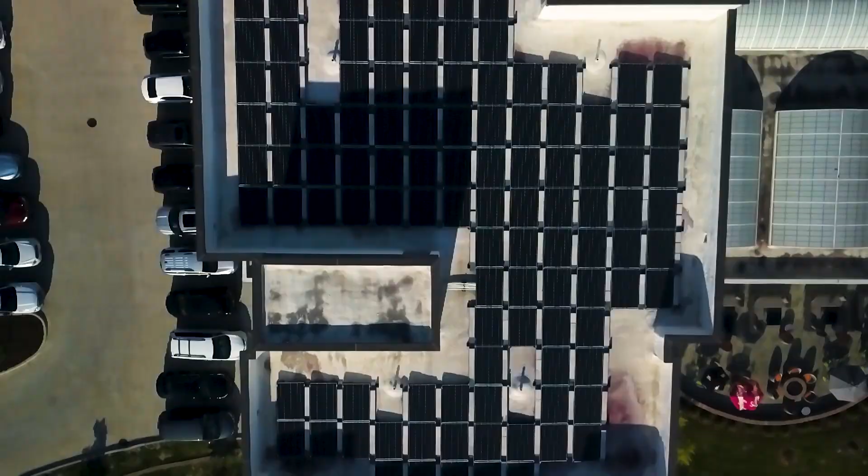All right, so we're going to unpack what happened on Battery Day. We're going to do it in 3 chapters. Chapter 1 is a quick recap of the important things revealed, and remember, there were a lot of them. Chapter 2 is what does this mean for Tesla, for the auto industry, and for you. And in Chapter 3, we're going to revisit the Osborne effect and why Battery Day is bigger than Elon let on.

Drew Baglino, who is the Senior Vice President of Powertrain and Batteries at Tesla, has been with Tesla since 2006. He was on stage with Elon following the shareholder meeting, which was held kind of like a drive-in movie. Yeah, if you didn't know what you were looking at, it would kind of look like the worst traffic jam in history, complete with beeping and everything.

This is where the shareholder guests who got in by lottery were socially distanced in their Teslas. Very creative way for Tesla to do this. It's funny that we haven't seen other auto manufacturers do this for their investor days. Normally, they're not this exciting, because they'd have to have their ICE cars just sitting there idling.

Yeah, so anyway... please. Oh, I'm going to pass out.

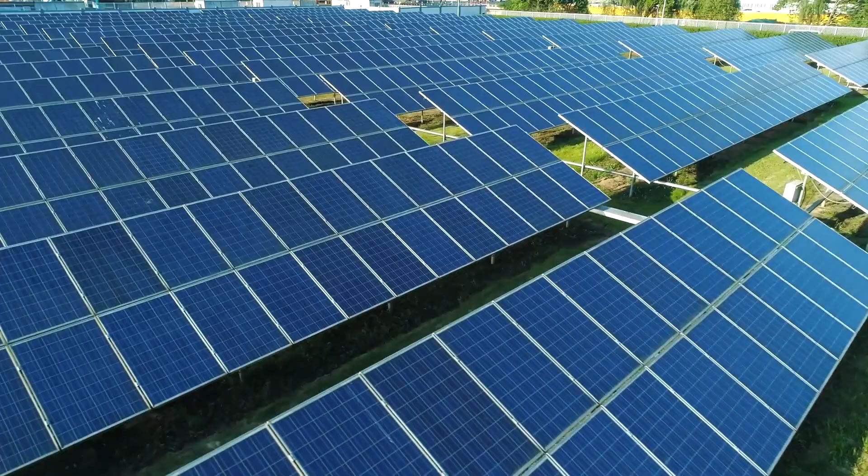Elon and Drew started the presentation about why Tesla is doing this at all. Why are they innovating? They pointed to the CO2 levels in our atmosphere, which are skyrocketing, and said we have to transition to sustainable energy in order to support life on this planet as we know it.

I just want to point out, this is different than any other company you ever hear about, because instead of saying we're doing this to make more money, they're talking directly to their shareholders sitting right in front of them. And instead of saying we're doing it for you guys, you shareholders, you give us money, we give you money, money, money, money makes the world go round, they're going, yeah, the world might keep on spinning, but we might not be on it any longer, or at least we won't have such a wonderful civilization as we do now. So it's really cool that during Investor Day, they're not like, we're seeing how we can squeeze every little penny to give back to our shareholders.

They pointed out that the trend is reversing, but that we need to accelerate that trend.

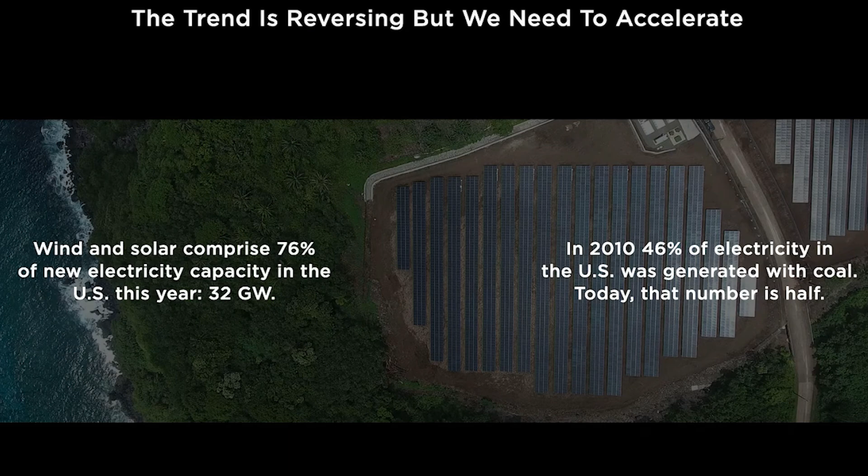They pointed out that in the US, 32 gigawatts of wind and solar capacity have been added this year. That's 76% of new power capacity. And to give you some idea about how the grid is getting greener, in 2010, 46% of US electricity generation was made by coal. Today, it's only 23%.

But Elon talked about how we need to accelerate this, how we can't just say we did a good job and sit on our laurels without doing anything more. And Elon showed how Tesla has been contributing.

As Elon said, Tera is the new Giga. I thought it'd be important to point out what that actually means. A terawatt equals 1,000 times a gigawatt, and that's 3 orders of magnitude in Elon speak.

So the problem, number one here, is that today's factories cannot scale fast enough to get to his goal. We would need, for instance, 135 gigafactories just to get to this goal. We'll be discussing how Tesla plans to solve this problem a little bit later on.

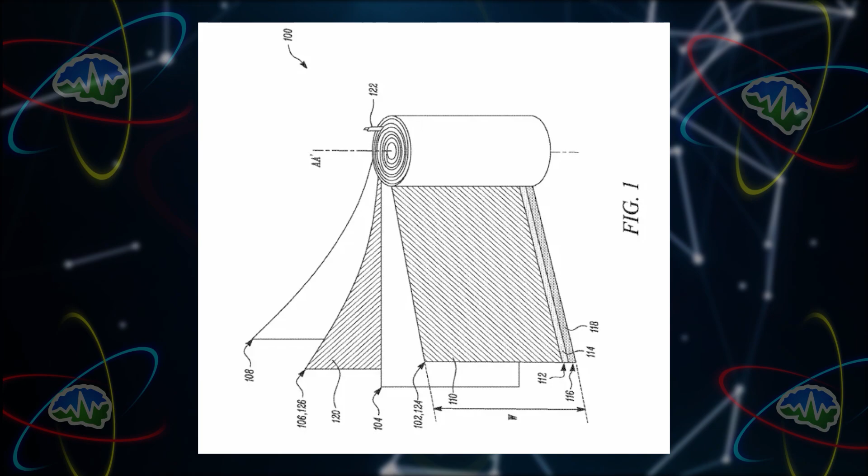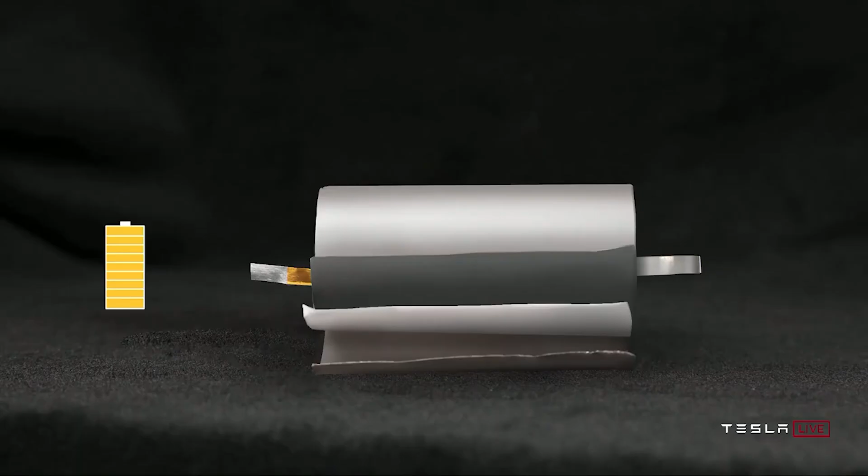So they first showed us a video of their original 2170 battery unrolling. You see one tab on the top, one tab on the bottom - this is how you charge and discharge the cell. You attach to those two tabs, and that's what allows you to charge it. But if you are an electron on the very far end of one of the sides of the jelly roll, you have to travel all the way down the jelly roll and then through the tab. And you heat up the pack the whole way.

Exactly. So if you were to make this large cell the same way, with this one tab sticking out of both ends, you would have a lot of thermal problems. You wouldn't be able to charge it or discharge it that quickly. It would work, but you couldn't do what you wanted to do with it, because it would overheat and damage itself.

So this is where the tabless design comes in. Basically, any electron can leave the cell just through the top or the bottom at any time. And so that's where we get this beautiful image of the top of the cell. So you can kind of say that it's not tabless per se, but that it is more tabbed. It's so tabbed that you wouldn't even call it a tab.

But this looks really familiar for some reason. Yeah, this is actually what was on the t-shirts that the people were wearing, and it was also what was on the invitation. Everyone thought that it was the silicon nanowire anode. Not that. It was actually a zoomed in picture of this. So it was a giveaway, but we just didn't know what it was.

Interesting. And I just want to say a big kudos to you because you got the size almost perfectly right. We had reported that we thought it was a 4576 by your calculations. Turns out it was a 4680. So I was off by 1 millimeter in diameter and 4 millimeters in height. Wow, it's pretty close. Yeah, really close.

And so this is what the cell looks like. And so what does this mean? There would be a 5 times increase in the amount of energy in this battery cell. Now, you might be saying, oh my gosh, Tesla cars are now going to have 5 times as much energy in them. No, it's per cell, and the cell is bigger. But there will be a 16% increase in range, just from this one thing.

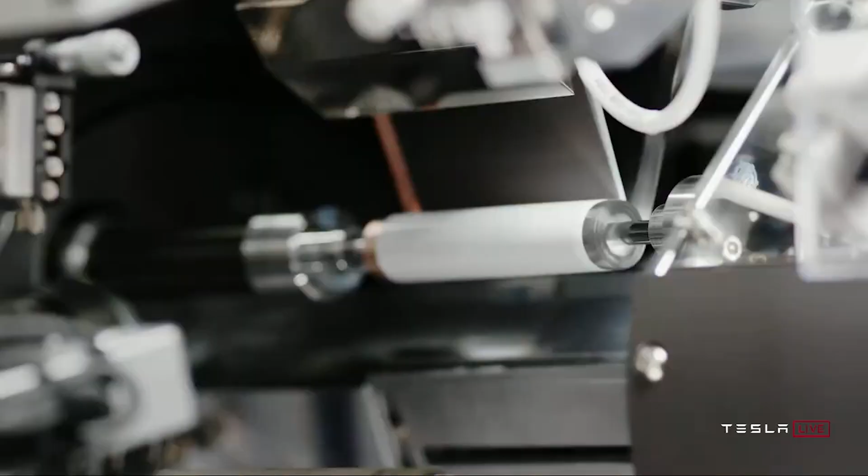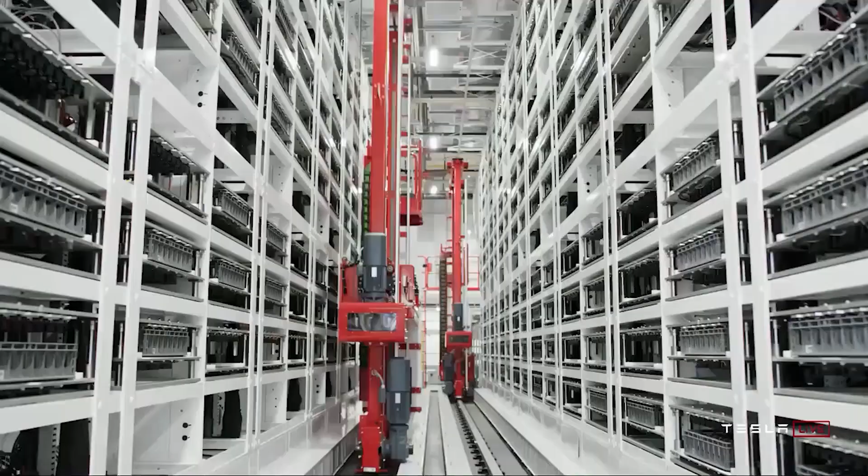I'm not sure exactly what the amp hour capacity is of this battery. We're going to learn that probably as soon as they start coming out. And the cool thing is they're producing these right now at the Kato Road facility down the street, and they're making them in volume. Drew said that they have actually made tens of thousands of these already at a rate of 10 gigawatt hours per year. Compare this to Giga Nevada, which makes 35 gigawatt hours per year. And think of the size of Gigafactory Nevada compared to the Kato Road facility, which is kind of tiny.

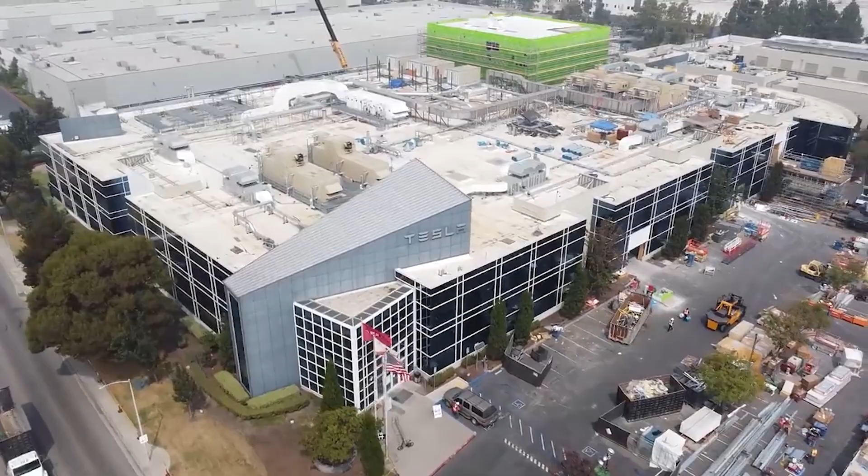So this basically means that they have a working pilot production line that they can replicate, because you can just go out and buy the parts or remake it and multiply it as many times as they want to. That is something that they could have stopped the presentation right here and said, and there you go. Yeah, and they could have left. And we should have all been pretty impressed by that, because that is impressive. To not only have made this cell with those specs, but also to have the pilot line ready to go that you can then duplicate in your factories.

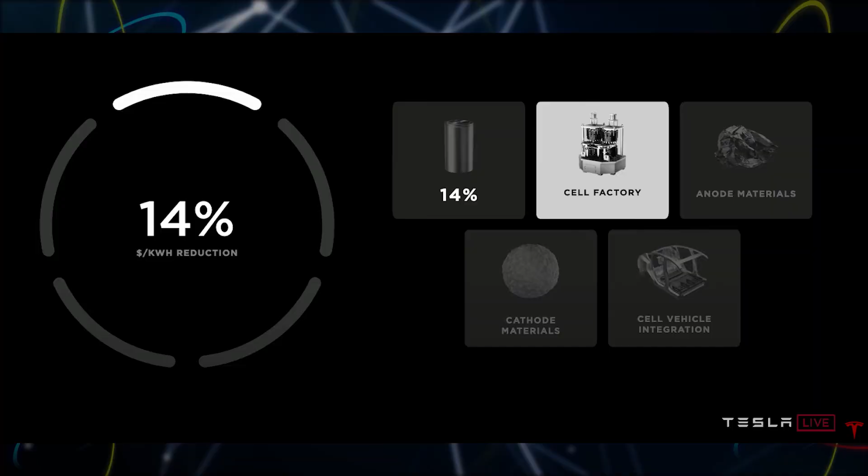Right, because this is a 14% reduction to the price per kilowatt hour. So if they had just come out and mic dropped after this, it would have been like, whoa, you already got a 14% cost reduction? Right, but that's not all.

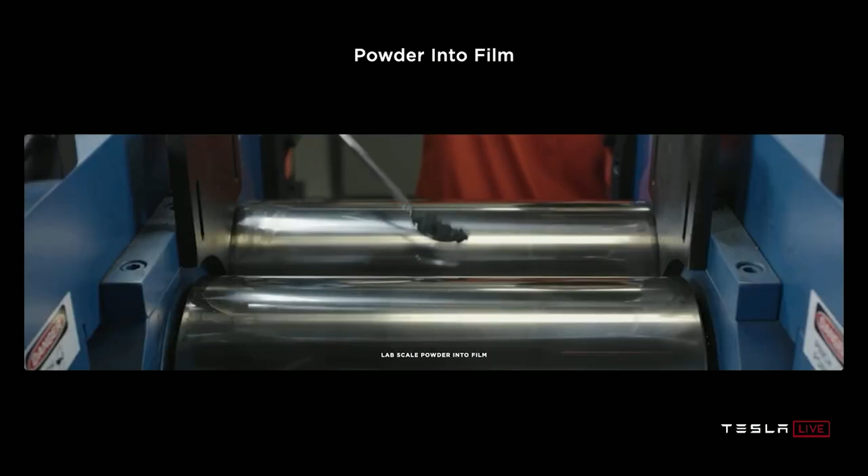By eliminating this, they have a 10 times footprint reduction, which means that they don't have to worry about wetting, mixing, or drying any of this wet electrode. Which kind of points to why the Kato Road facility is so much smaller than we'd expect. Exactly. And it has a 10 times energy reduction, because you don't need to be drying stuff, which obviously takes a lot of energy. And so what they showed here that they're going to is a high-speed continuous motion assembly. Nothing ever stops. I want you to think about this for a second. When I think of a factory, I think of this.

It's slow, but their factory is showing that nothing ever stops. As Elon said, conveyance does not count as useful work.

What does he mean by that? Just because you're moving something over to a machine that's going to do work on it, that doesn't really count. You want everything to be both conveying and doing work at the same time. You don't want it to just be like, okay, here you go, Bob, fill it up, Bob, okay thanks Bob, moving it on to the next station. No, you want it to be moving and pouring at the same time, then going off to the next thing. Elon doesn't want any waste of space.

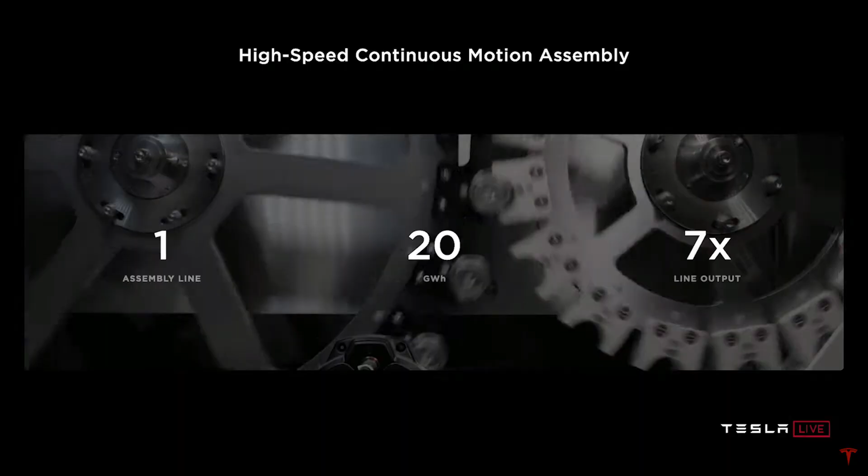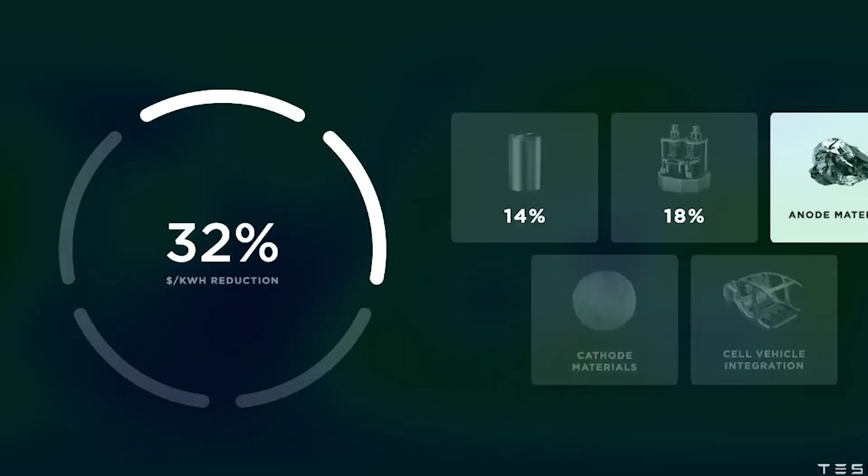So this new cell factory line will be able to produce 20 gigawatt hours a year, and it's 7 times the line output, at 86% formation investment reduction and 75% formation footprint reduction. So we've now dropped to 32% of the dollar per kilowatt hour. What a savings we already have. This is a huge deal. And again, they could have mic dropped there. They could have said, 'and that's battery day,' 32% reduction in battery cost per kilowatt hour, which is the thing that you care about. That's amazing. But we're not done yet.

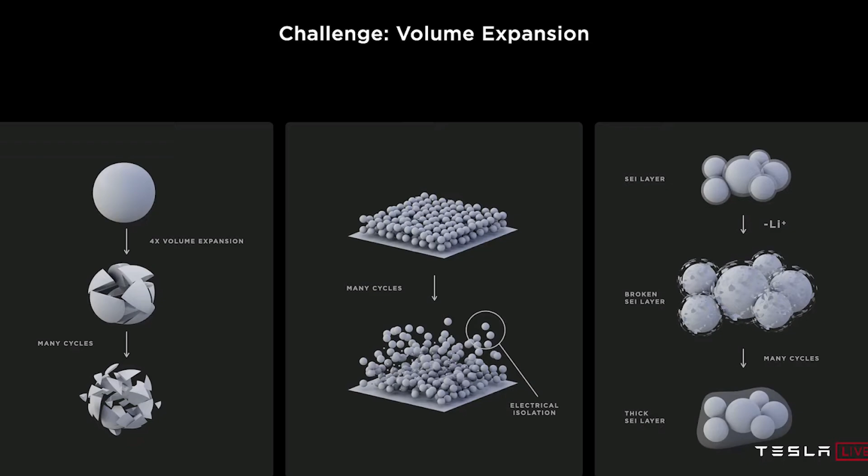So let's talk about the anode material. As Drew said, silicon is awesome and inexpensive, but the challenge has been that when you put silicon into a battery, it expands by 4 times every time you charge up the battery, and so it cracks. This leads to a problem, because then your battery cell degrades very quickly, which is not something you want in a battery you want to use again and again. But what's awesome about silicon is that it's super cheap, dirt cheap, because it's basically sand.

And so they've come up with an elastic ion conducting polymer coating. I don't know what that is, or how they did it, but this basically increases the range by 20% with just this one improvement. First they stabilize really tiny particles of silicon, then put it into an elastic binder that can both transmit electricity through it, but also expand and contract with the material itself. Again, this could have been all they had to say at Battery Day and mic dropped again, and it would have been amazing. 20% increase in range, that is huge. And on top of that, we're now up to a 37% reduction in dollars per kilowatt hour.

And let's not forget the cathode. Right now Tesla has nickel-based cathodes, which are expensive but very energy dense, and iron-based cathodes, which are less energy dense but cheaper. They talked about how they were working through new ways to create battery cathodes with nickel without having to use cobalt. That's huge in itself, because if these batteries could be cobalt free, it means we can finally get away from this sort of blood diamond discussion, where there's a lot of human rights concerns about producing batteries that contain cobalt. So by getting rid of cobalt entirely, we don't have to worry about that anymore.

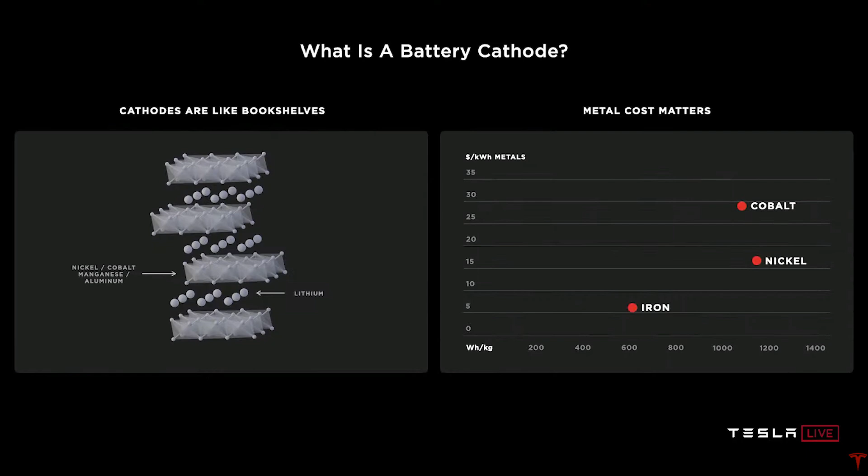Then you have nickel, which isn't as expensive as cobalt, which is great, and gets you great energy density. So that's an obvious choice for most batteries, but we have a limited supply of nickel. So even though it's not that expensive and is great for battery manufacturing, we don't have enough nickel being produced in the world. Not that there isn't enough nickel in the world, but there isn't enough being produced at the moment to keep up with demand.

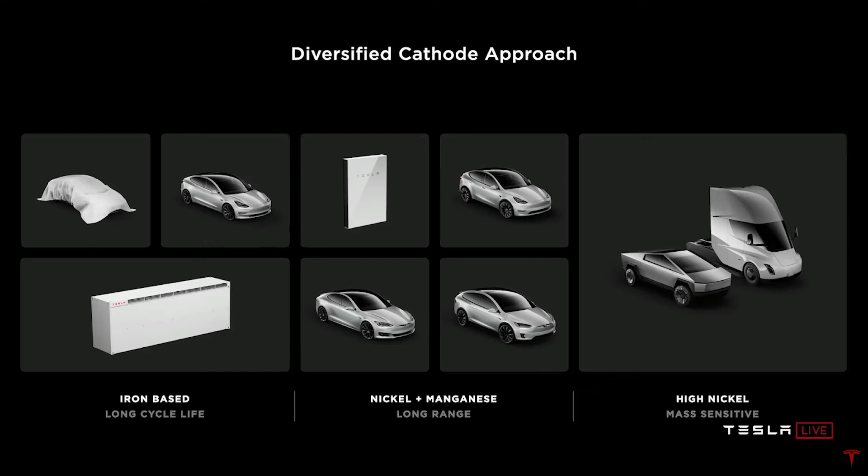So Tesla is diversifying their cathodes. They're looking to iron, which is even cheaper but less effective as a battery, to be used in products that don't necessarily need the highest ranges. Lithium iron phosphate is a great choice for grid storage, where you don't need to worry about how light it is. And it's a surprise to see in this graphic that they seem to want to put it into the Model 3. We know they're already doing this in China, they have iron batteries in those. But it's funny that they also have the Model Y on the other side with nickel batteries, and then high nickel density batteries for the semi-truck and the Cybertruck.

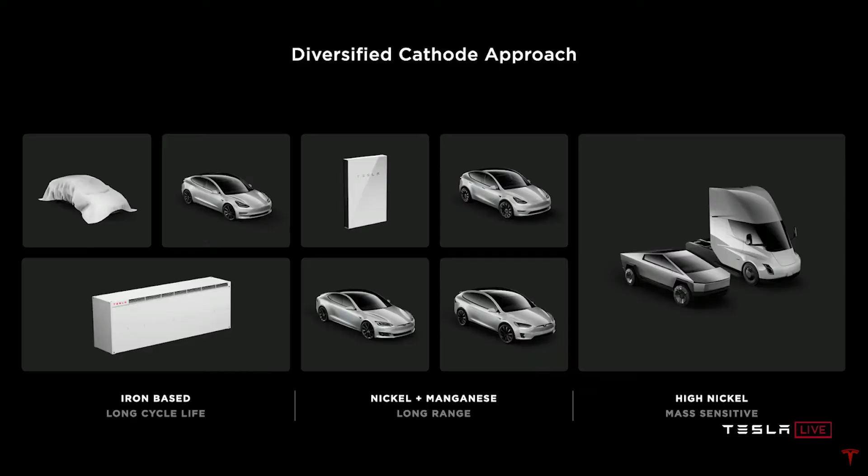I kind of wasn't expecting to see the Cybertruck with the semi-truck. I thought it would be back with the Model S and X. So that's interesting. And again, we get this glimpse of this covered car in the iron battery category, which would be whatever you want to call it, the Model 2 or the Model A, and the robotaxi. Yeah, we'll get to that.

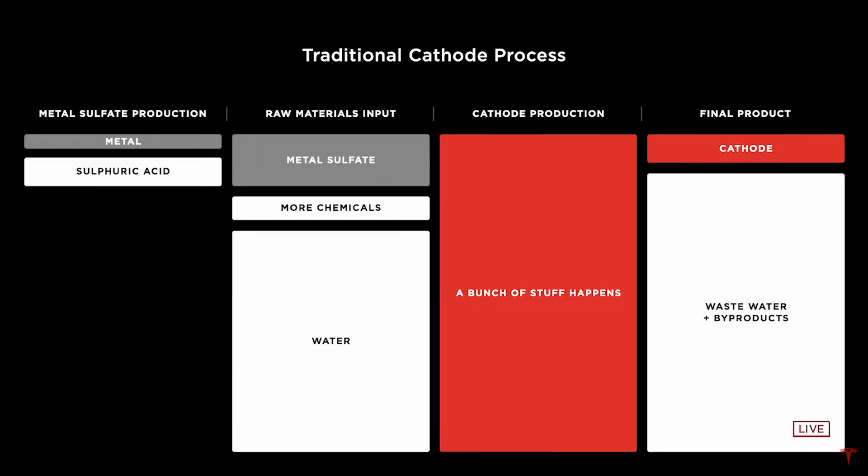So then they discussed how they can save by processing the cathode in a novel way. Basically, they're able to take raw metal nickel powder and mine it and process it cheaper than they were before, and they get a 12% savings. So now we're up to 49% cheaper dollar per kilowatt hour to make a battery. And again, drop the mic, 50% cheaper batteries? Are you freaking kidding me?

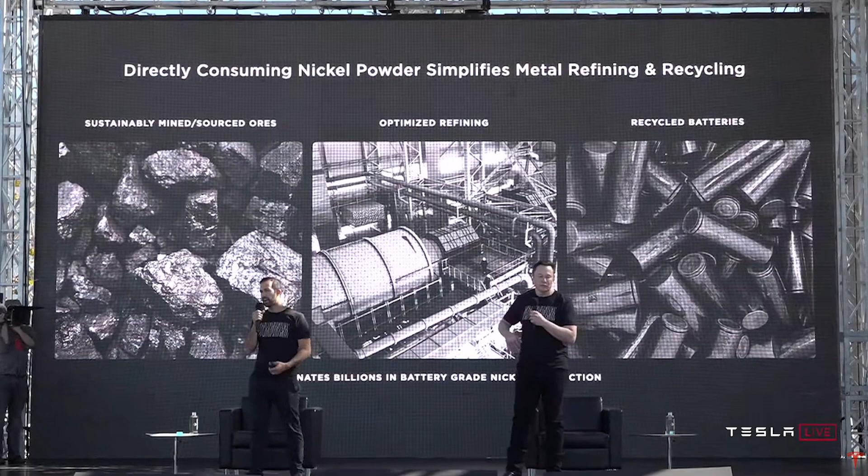What's really cool here is that they mentioned that with a simpler mining of lithium and nickel, it also makes for simpler recycling. They didn't mention Redwood Materials, which I kind of thought they would in this presentation, but I think it's through a partnership with them that they're able to bring this in-house, because they mentioned that going forward there's going to be more and more batteries that need to be recycled as we get more and more cars. So they're going to in-house start recycling them, because look at this graphic here: it's cheaper to take the materials out of a battery you just made than to go mine them. Why pick through dirt and rocks and twigs if you're mining it? Why not just take old batteries, rip them apart—all the stuff we need for batteries right here because we're making a battery.

And they explain that they're using a new process involving table salt, sodium chloride, that they can extract lithium cheaply from clays. Yeah, and there's 10,000 acres right in Nevada that has enough lithium in the clays there to supply all of the U.S. battery needs. So again, they just developed a new way to get lithium that they said no one else had ever come up with. This kind of puts an end to that argument that your old Uncle Joe is going to say, like, they're getting all the stuff from China or Saudi Arabia or wherever I don't like. No longer the case, unless your uncle doesn't like Nevada.

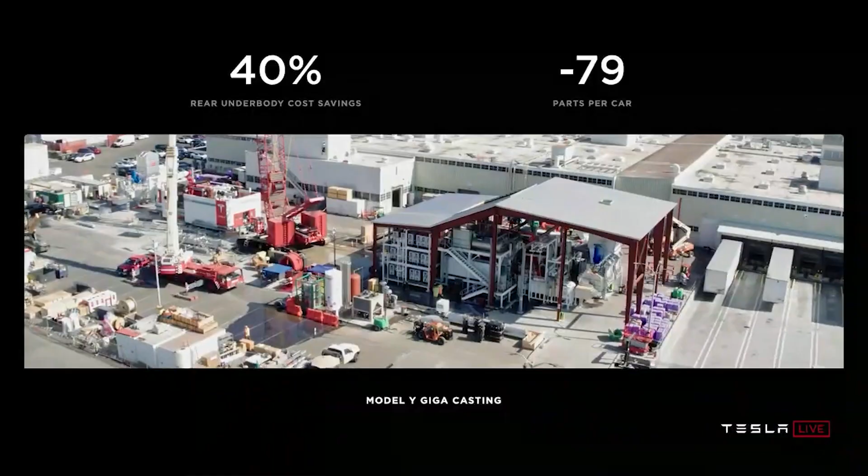All right, so let's go to the next step, battery integration. We've showed you the GigaPress before, but now we get to actually show it to you in action. Check this out. Now, I just want to say, this is not how any car manufacturer produces any large part of a car at all. This is a completely new process. Sure, there are castings, but none of this size and magnitude.

And what this means is that you can reduce the cost of the Model Y's rear underbody casting by 40%. Yeah, with 79 fewer parts per car. And they're going to be able to do this with the front body casting as well. They also talked about having a structural battery pack, which further lowers mass by 10% and increases range by 14%. This means that you don't have to make modules and packs—you actually just put the batteries into a structural thing that it's all one unit, and that becomes the structure.

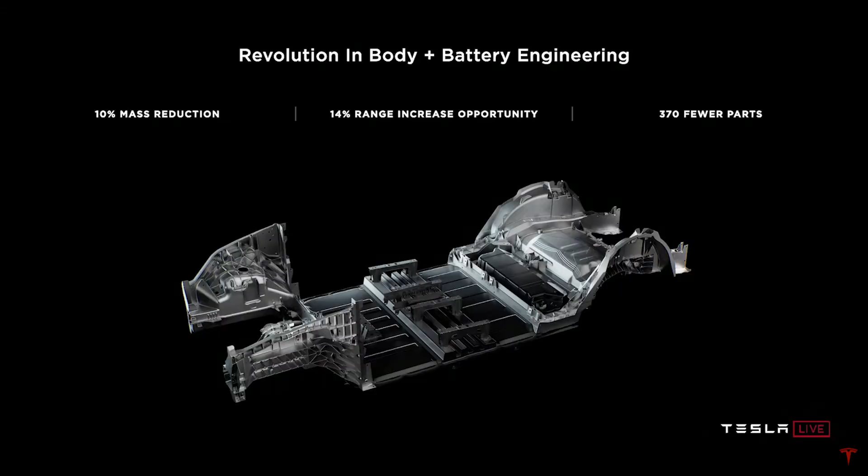Which is a lot like an airplane wing. Exactly. Elon was saying even in a Formula One car where you'd have two pieces of carbon fiber with like an aluminum honeycomb, which gives it really, really good strength, you're doing the same thing here, but with the batteries of the car. So it's no longer just air, it's actual batteries that are now a part of the frame of the car. It's a really, really smart process, and it's going to eliminate 370 parts from your car.

Now you might be saying, 370 parts, blah blah blah, whatever. No. Take any one part. Think of a bolt—it's just a bolt. I don't care. When you're manufacturing something, it's not just a bolt. It means that there needs to be a machine that makes bolts somewhere, and you need a guy to go run it every day. Then that guy needs to put all the bolts in a big bucket and send them to you. And then you need to have a space in your factory for those bolts to go. Then you need someone to go over, get the bolts, put it into the machine, you dump it in, however you do it.

You need to worry about all of that for every single part. So by eliminating 370 parts from that, imagine the savings, and you just go right into the cast. It's all set. That's insane. Yeah, that could have been another mic drop moment.

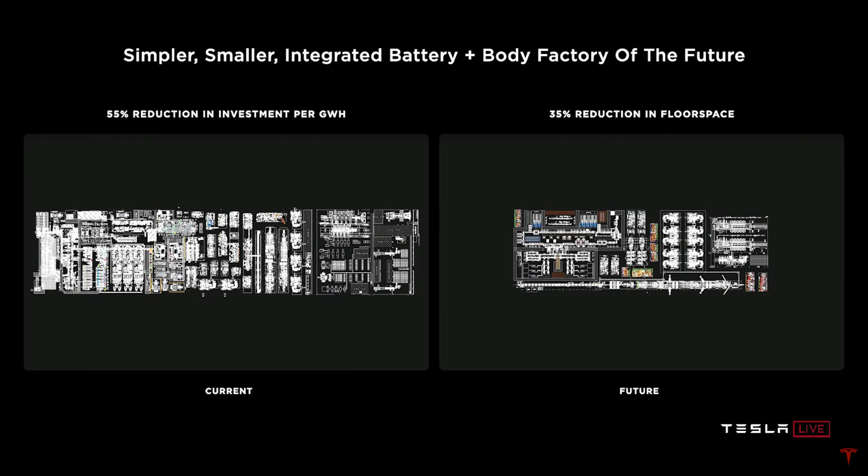Exactly. But this also means you get a 55% reduction in investment per gigawatt hour and a 35% reduction in floor space. So this gives you an additional 7% reduction in dollars per kilowatt hour, for a grand total of a 56% reduction in dollar per kilowatt hour.

They could have just stopped right there, dropped the mic, and said we're going to have the best, cheapest batteries, goodbye, good night. But then they popped up this slide showing that not only are you getting 56% cheaper batteries per kilowatt hour, you also get a 54% increase in range, and it's 69% cheaper to produce all these batteries because you don't need that much investment to build the factories.

So this is huge. If you combine these together, I get 50% more range, I get 50% cheaper car. I think that I get a free car, right? It's not that simple. We're going to talk about this in chapter 3.

Okay, let's go to the end of the presentation where Elon presented this. With all of these advancements, Tesla thinks they can produce a smaller electric car. Elon said 3 years from now, which would put us at Q3 of 2023, and it would cost $25,000. Let's call it the Model 2 for now. This could be hugely transformational, and we're going to talk about that more in chapter 2.

But they weren't done. Model 2 wasn't the only thing they unveiled. Elon was so excited he just wanted to start talking about the Plaid Model S. It will have a range of 520 miles, 0 to 60 in less than 2 seconds, a quarter mile speed of less than 9 seconds, 1,100 horsepower, and a starting price of $139,990. So $140K, not cheap, but really fantastic specs.

Liftoff of the Falcon 9 and Crew Dragon. Go NASA, go. Hey Elon, I know you're busy changing the world. I just wanted to thank you for being so successful at accelerating transitions to sustainable energy. Although the world momentarily paused to fight the invisible enemy, we both know the EV revolution hasn't slowed down. And we made it our duty at Nouveau Monde Graphite to keep up with the Western world and the EV market. Now that you have terafactories in mind, we figured we better up our game. We're now producing spherical graphite, a first outside China, and we're weeks away from launching our purification operation, leveraging Quebec's clean and renewable hydropower to provide you with carbon-neutral material. Lab test came back, boss, and it looks like our unique thermochemical process is the one. So, if you excuse me, guys, we don't have time for this. I got 2,500 gigawatts of battery production in the pipeline. So leave me alone. So we have a special offer just for you. We'll trade our graphite for your semi-trucks. And if you can throw in a few superchargers to power up our all-electric mine, I think we have a deal. So from our mining and transformation operation to your battery plant and back to us, that's called circular economy, my friend. Now, I'm no Jordan, but our battery material will be scoring points.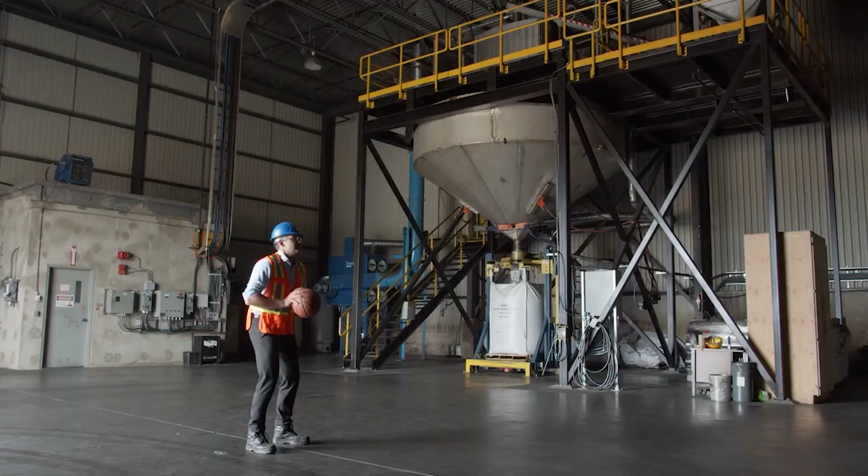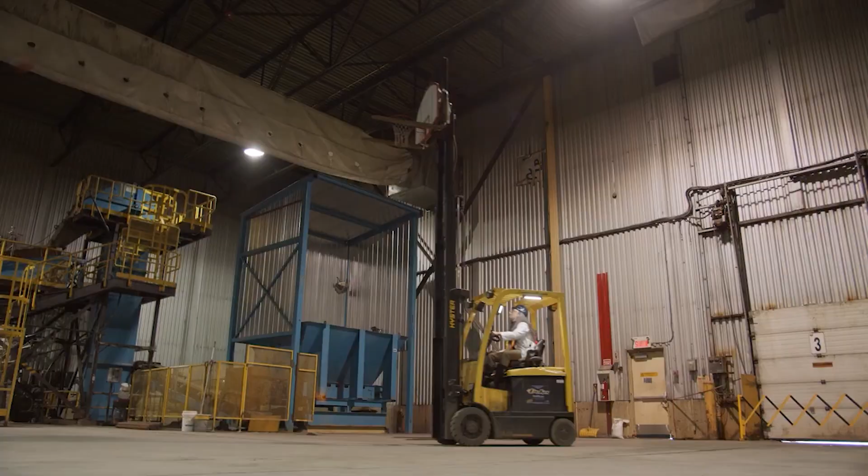Got it, baby. All right, gang. Time to put the pedal to the metal. We got a Terra customer waiting for a shipment. Chop, chop. Come on. Good job, Rick. Hey, salute. Who am I?

Looks like Europe is now full throttle on the EV revolution. Désolé, guten Tag.

Oh yeah, that was really awesome. Yeah, they always make such good videos, and they also make such good graphite, I hear.

Yeah, because what is Tesla talking about? The fact that there needs to be tons more materials to go into batteries, and one of the big materials you need is graphite. So that's one takeaway I have, is that there's a lot of mining companies out there that are going to be very busy.

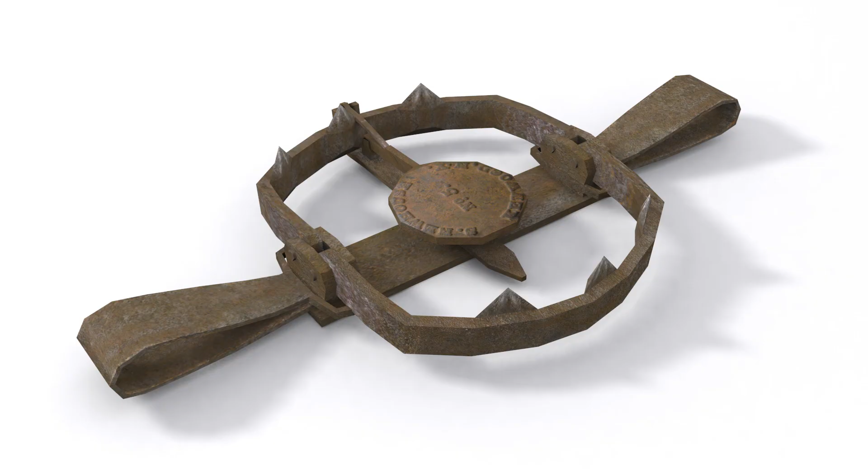Next, I want to talk about how this presentation basically showed that it's game over for Big Auto. So we've talked about this chewing off of the leg before, right? If you're stuck in the forest in a bear trap, you kind of have 2 choices - you can either sit there and bleed to death, or you can chew off your leg and try and hobble your way out of the forest.

Well, what Elon just did here was he made the forest bigger. Did he make the forest bigger, or did he make the clamp tighter? One of the two. Big Auto is in trouble. There is less and less runway for them to switch.

They don't have this luxury of switching to EVs faster because as Tesla makes it more and more affordable to switch to an EV, which is already the better choice in my opinion, and we've already proven this - butts in seats, as soon as someone gets in a Tesla, they don't want to get out of it. So Big Auto either has to follow Tesla's playbook, which they kind of revealed a few pages of on Battery Day, or they're truly gone. And Tesla was already moving fast, but now they just sped up again.

This is so much innovation announced here. They basically are simplifying processes, going back to first principles. I'm thinking traditional auto manufacturers can't catch up. They're dead. They just don't know it yet.

Tesla has actually been the one pushing these innovations of the systems of manufacturing the cells themselves. It's not like they're subbing out to Panasonic to produce cells better and more efficiently. Tesla is doing that work. So Tesla owns that. That is not just something out there in the world to be bought. That is something Tesla has. And Tesla has the engineers and the minds to actually do that, whereas all of these other manufacturers have always just been like, yeah, we'll buy that part from here, we'll buy this part from here, but we'll just make the engines. Tesla doesn't do that. They are a completely vertically integrated company.

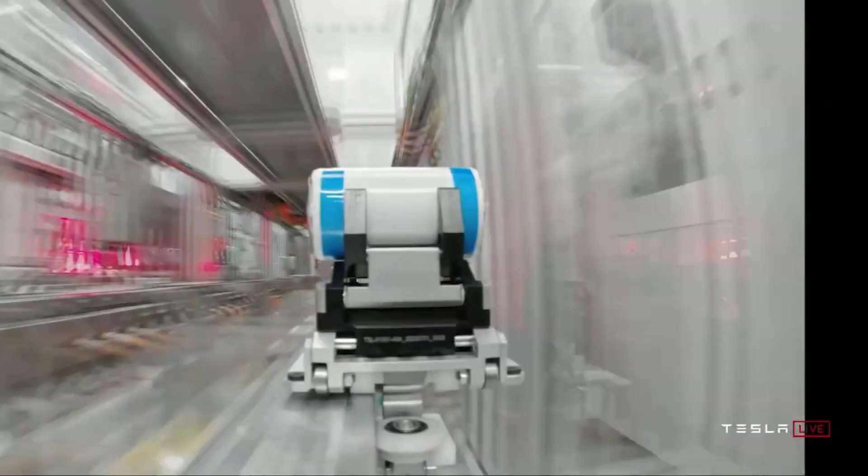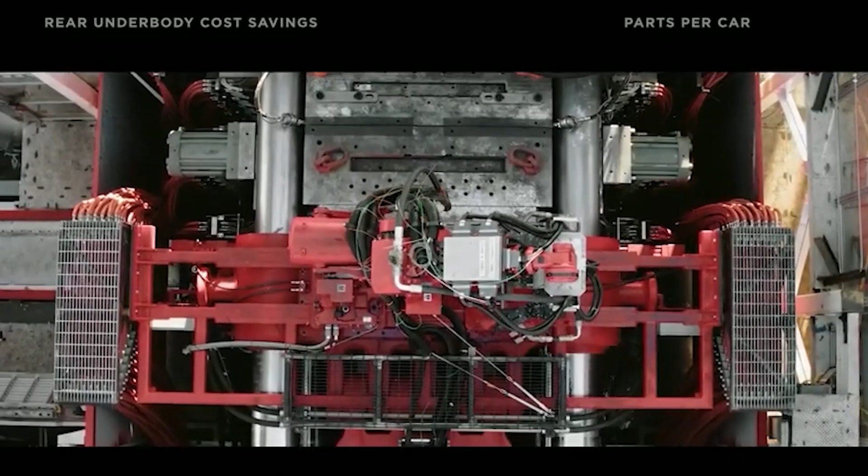So this is, to me, unstoppable innovation - a new tabless technology, cell-to-pack, bigger battery, simplifying the nickel manufacturing, new lithium mining, gigapress. This is all non-stop innovation. Heck, they're already on revision 4 of Maxwell's dry coating process machine. The machine that makes the machine is coming into its own.

Now, Tesla used to be cash limited. This is what Tesla looks like when cash is not an issue. To me, this is an opportunity to buy more Tesla stock. Jesse and I are long on Tesla for a reason. If we're looking into the rearview mirror, who can possibly catch them at this point? And this leads me to another point about what Battery Day really was - this was a recruiting ad.

Just like Neuralink Day was a recruiting ad for more qualified people for Neuralink, this Battery Day was essentially a big ad to the world's smart people, saying, want to be part of a company that is changing the world? Then we need you. This was essentially an accelerated college course in battery technology.

I was not expecting them to say any of that stuff. I was expecting them to come out on stage with a battery, say here's our new battery, it has all of these specs, and goodbye. Instead, I'm going to explain to you very complicated battery stuff. Oh, let's talk about the cathode. Let's talk about the anode.

Analysts and people who are not used to hearing anode and cathode and manganese, their eyes were glazing over and they were going, what are they talking about? Why am I in school again? I don't want to, am I taking notes on this? Oh, this is why the stock dropped, because people don't really understand what was going on.

This accelerated course in battery technology is exciting the engineers of the world and the smart people of the world to say, wow, I could actually go work for this company because half of that made sense to me. Yeah, Tesla is no longer cash limited. They are just quality people limited.

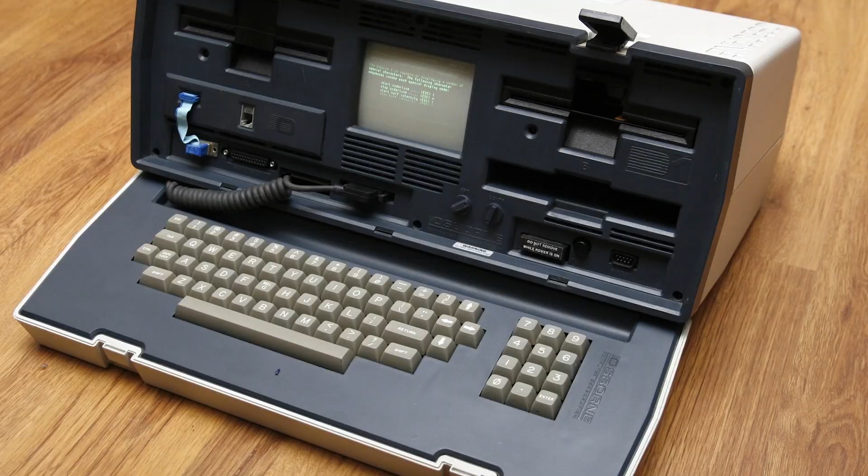Now, the Osborne effect gets its roots from a company that was going to release a computer in one year. They said, here is what our computer is going to have, you can buy it next year. And the company went bankrupt because no one would buy their computer that was available this year. And so that became the Osborne effect.

I think what you saw at this presentation was Elon having to walk this fine line between telling you everything, and if he told you too much, he would introduce the Osborne effect. Meaning, let's say that I'm Elon Musk and I come out and say, hey, in 2021, you're going to have this Model 3 with this range at this price.

Oh, wow, that's so exciting. I can wait for that. I can sit here, not buy a Model 3 at the current price, and wait till the price comes down. And that is the Osborne effect.

Elon couldn't come out and say the results of what he was saying here. He was basically just giving you a bunch of puzzle pieces, and if you're smart enough to put the puzzle pieces together, you can go like, oh wow, I think that they might actually make a cheaper Model 3, or oh wow, if they really make this $25,000 car, what am I doing buying a Model 3 for almost any price?

And so the whole presentation was this balancing act between telling you too much and not telling you enough. I think that's one reason why Drew was on stage with him. If you noticed a few times throughout the presentation, Drew kind of stepped in and stopped Elon from talking, or he would temper what Elon had just said, saying oh this will happen eventually, or we're not actually there yet, or stuff like that. That was just kind of lowering the expectations, lowering the excitement about certain things.

And again, I think that's why the market was kind of confused. They're like, I was expecting some big announcement, and you just told me a bunch of really exciting stuff, but nothing material that affects me today.

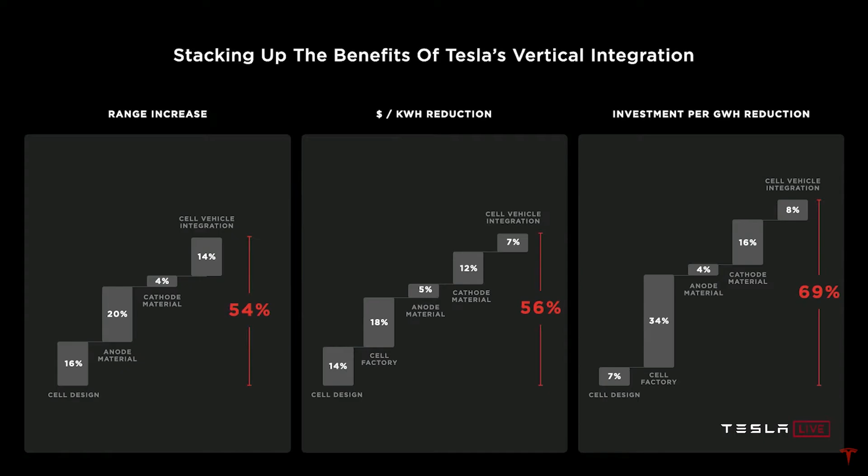Okay, so this means that I could take 50% range increase, multiply it by 50% price reduction. Because let's say the 50% range increase, let's say I want to keep the same range, so now I need 50% less kilowatt hours. And then I multiply that by 50%, so I get a quarter. I'm paying a quarter, and then I don't know how this 69% factors in.

We have to remember this all applies to the battery pack, okay, and not the entire price of the car. We were just talking about pretty much Battery Day here. Even though there were some improvements to casting of the car and stuff, we're mainly talking about the battery. So yes, this is big news. Being able to reduce the price of the battery is huge. Being able to increase its range is huge, but it doesn't mean the car is going to go from $35,000 down to $10,000. It means that we're going to get the price of the battery from something like $7,500 down to something like $3,200. And that would be if you kept the same range.

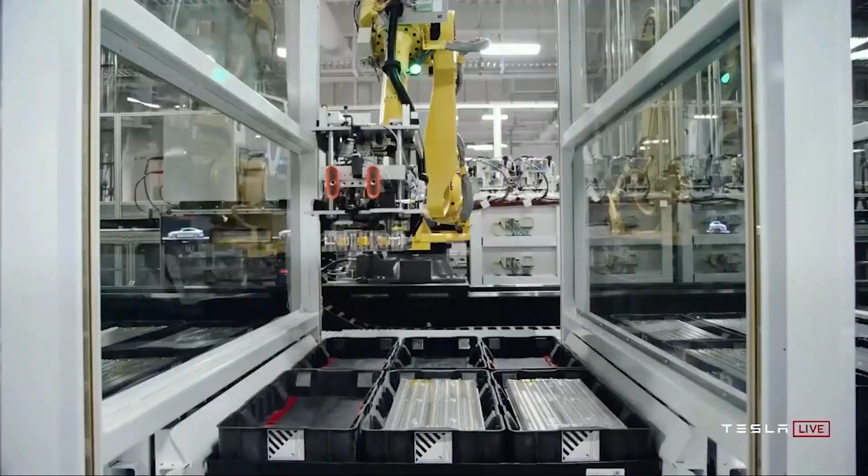But what they're talking about here with the range increase is both an efficiency increase of the car, probably by reduction of weight in the battery pack, but then also being able to fit more batteries in the car, which means that you're increasing the kilowatt hours of that car, but you're paying less per kilowatt hour for the additional kilowatt hours. So you could have, say, the long range Model 3 with a range of 400 miles and roughly the same price. This is basically why he was able to say that you can get a $25,000 Model 2 in 3 years, because of all of these efficiencies that they're going to come out with.

So my conjecture here is that Elon's going to do something he's never done before. We're not talking about Elon time anymore here. I think he's actually reversed himself. Normally he tells you that something's going to come out in 2 years and it might take 3. I think what he did on Battery Day was tell you that it's going to take 3 and it's only going to take 2. I think that Tesla stands a lot to gain by exceeding expectations, and one of the ways that you can do that is by just having expectations be a little bit lower.

Now, let's go to Chapter 4. Wait, Chapter 4? There is no Chapter 4. Well, I knew you wouldn't read the whole book if I told you how long it was. I'm adding a chapter in here. All right, this is Chapter 4, Disappointments.

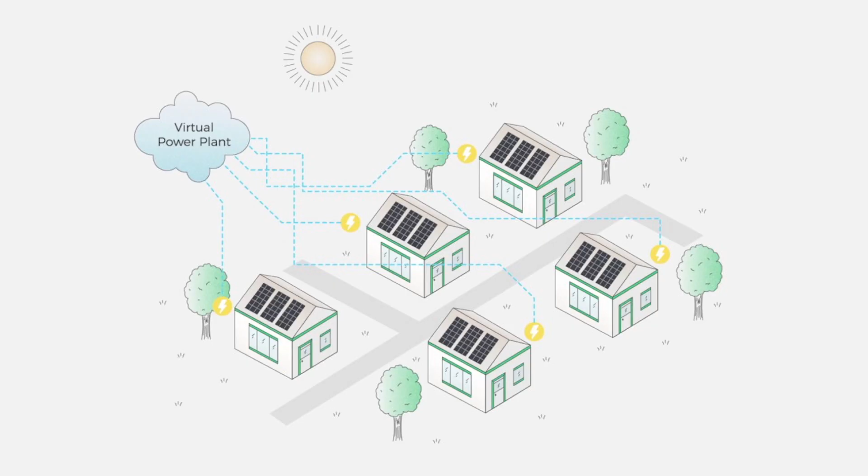So basically, I was disappointed, I got to admit. When there was no talk of V2G, which is Vehicle to Grid, or VPP, which is Virtual Power Plant, I got kind of bummed, especially since the number 2 say.com retail investor question was about Vehicle to Grid. And I thought that Elon's response that they tried it with the original Roadster was kind of a lame answer. So I don't know if this is just they're not really ready to do this yet and they're pushing it off, or if he honestly isn't that interested in it. I don't think that he is that interested in it yet. I think that we can sit here and look at the potential of V2G without having to think of the implications of it.

At this point, does it make sense to have V2G? Not really. We need more charging stations capable of bidirectional charging. We need more cars on the road, period. And we need a system in place to enable VPP. Tesla already has all that stuff for VPP. They have large grid scale batteries, solar on people's roofs, and in-home batteries that can all be turned into a VPP. Then adding on the V2G after that isn't as hard.

Then the second thing that kind of bummed me out was that we didn't see a vehicle refresh. I mean, we heard about the new Plaid coming out next year, but there was no car on stage, no exterior or interior refresh pictures. I think it really would have helped the presentation if Franz had driven up on stage in a new Plaid that had been refreshed, because then that's all people would be talking about right now. But that didn't happen.

And I think that also when you're configuring your Plaid Model S, there's nothing in the configuration process that will excite you. There's no real difference in the look. Even though the Model S that we saw on Nurburgring was kitted out with body kits, spoilers, front spoilers, and all sorts of crazy stuff, none of that seems to be on the page on the Tesla website. So there's nothing to really get too excited about. It's going to look the same, just have a little bit more performance and obviously cost a little bit more.